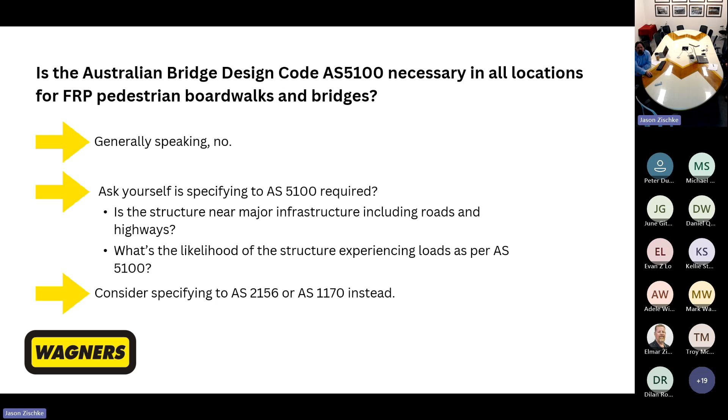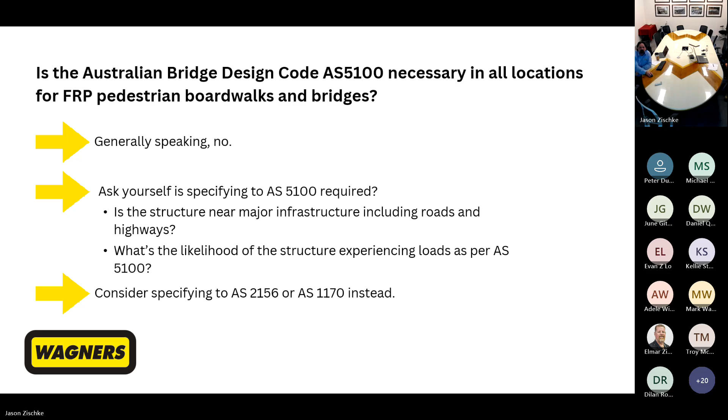And now for the visual learners that we have in the room, the next slide shows... Kellie, can you show the next slide? I think I've got the wrong one sitting up. I'll just cancel my share, but the screen doesn't seem to be showing the right one. Absolutely, no worries. Just let me pull up that presentation. Doesn't seem to be showing the right one.

Okay, so I think this is the one you wanted, Ali. Yep, this is a slide. Yeah, so basically, this is a visual representation of two bridges. Both of them are the same length, slight difference in the width, and that's mainly gonna affect the overall UDL loading on the bridge. But one of them, the Eidsvold Pedestrian Bridge, is being designed for AS 5100.

That's for TMR. The second one on the right hand side is the Scottsville Pedestrian Bridge, which is also the same length, but it's been designed for AS 1170 and AS 2156, which means basically slightly lower design loads. The point load is significantly less than the one on Eidsvold Pedestrian Bridge, and that's going to mainly affect the decking and the joist system of the bridge. But the overall design of the truss bridge is still going to be governed by the UDL and the 5 kPa loading.

However, these two bridges, as you can see, one of them is a heavy-duty bolted truss bridge to be compliant with AS 5100. The other one is a riveted light-duty truss bridge. Both of them serve the pedestrian use, and both of them meet the vibration requirement and the pedestrian comfort level. But as you can see, there will be a substantial difference when it comes to the design and the cost efficiency of these two bridges.

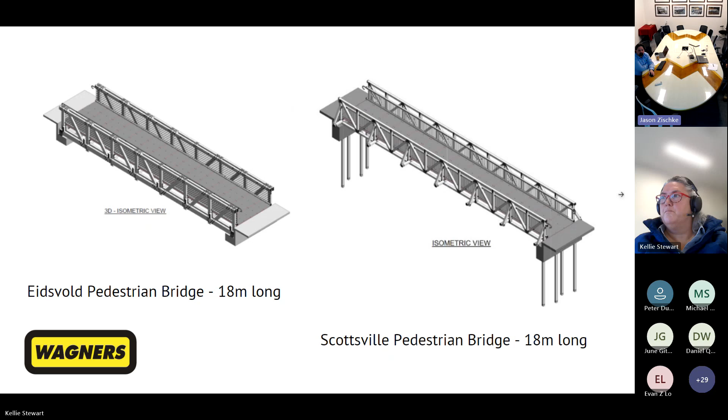And the next question, I'll hand it over to you, Jason. Yep. All right. The second question we'd like to help clarify was what track do I require for my pedestrian structure? Now, I agree that terminology within 2156.1 is very vague. Although I found one website that provides excellent clarification on this. That's the New South Wales National Parks site,

which... just a minute. That just zoomed in and out. I was hoping that moved to the next page. You can, yeah.

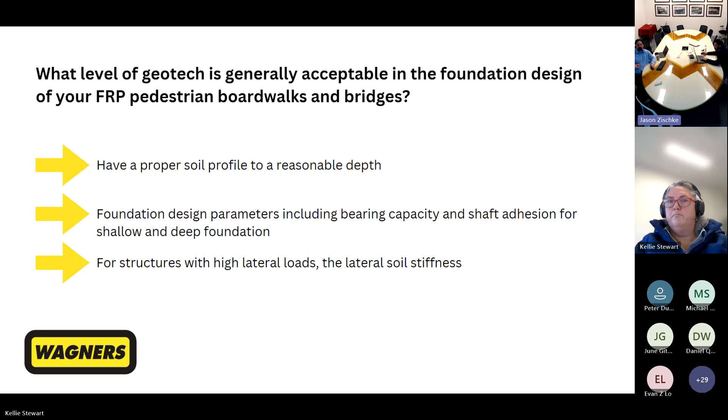Right. Okay, so our sixth question we get normally asked is what level of geotech is generally acceptable in the foundation design of pedestrian structures? The design of most pedestrian structures is completely different to your average house slab design that only requires a soil typing geotech report. As you can see on this drawing, the next one if you can, Kellie. Here we have a pedestrian bridge that we designed in Auckland, New Zealand.

These structures that we generally design are founded generally upon deep foundations, as you can see. So we need a more in-depth view of the ground's conditions in as many spots as possible. And as you can see from this bridge, it's only 66 meters long, and we have variations in the soil from the left-hand side to the right-hand side of this bridge in the subsoil layers. And for us to accurately design these foundations, we rely totally on the geotechnical engineer's determination on bearing capacities, skin friction, and lateral soil stiffness properties that these layers have been detailed as. Right.

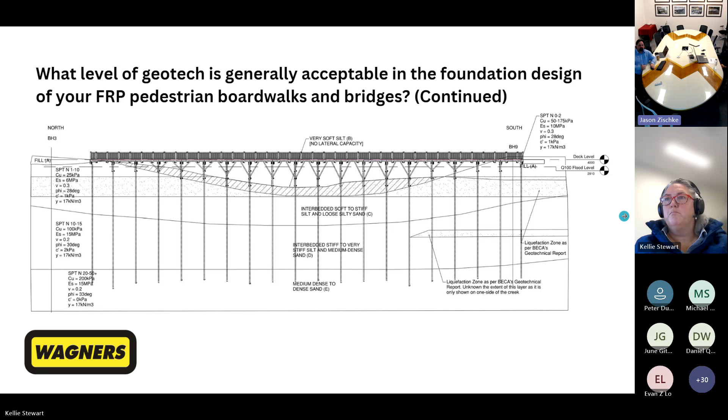Yeah, the next question is about the wave and flood modeling for pedestrian structures. So basically, this question is straightforward, and it's kind of like the answer itself. So basically, every structure within a flood zone will be required to be designed for water forces. And basically it will require a hydrology report, which usually comes from historical data with some theoretical prediction for the next events in the next 100 years or 500 years, depending on the design requirement.

And basically we will require the water velocity, and also the water level, and also the cross section of the creek, just to determine how deep the creek is with respect to the structure. Same thing basically with the wave loads. So the wave loads will be subjected to all the structures that are within the coastal zone, and also subjected to wave loads.

In other words, where the wave loads can be high enough to reach the structure or the substructure or the whole structure. So for those specific cases, we talk with the coastal engineers to provide us with the wave analysis reports and provide us with the loads in kPa to design the structures for such extreme forces, which in many cases is what usually governs the strength limit design of the structure.

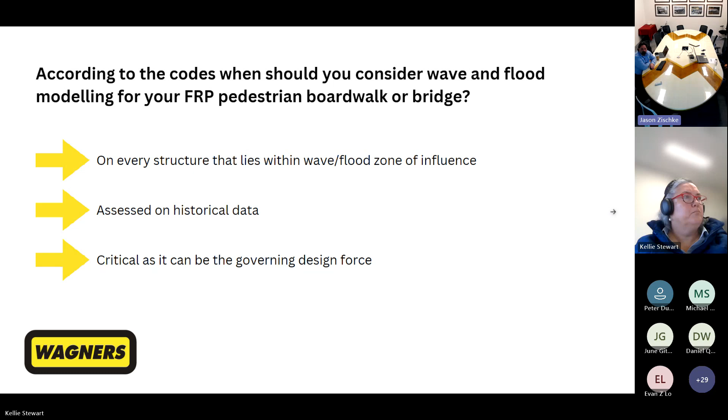So moving on, another question that arises when considering AS5100 is the effects in the difference of the deflection when designing glass composite fibre structures. On the slide here, we have two different designs. The left is a 10-metre bridge design in full consideration of AS5100 deflection requirements. As you can see here, the thickness of the floor structure is about 500 mil, whereas on the right-hand side, we have a structure that's just been designed to AS1170 deflection requirements with a much smaller floor thickness of 400 mil. Both these bridges were designed to take the same live loads, but it's just purely the deflection limit that governs that thickness.

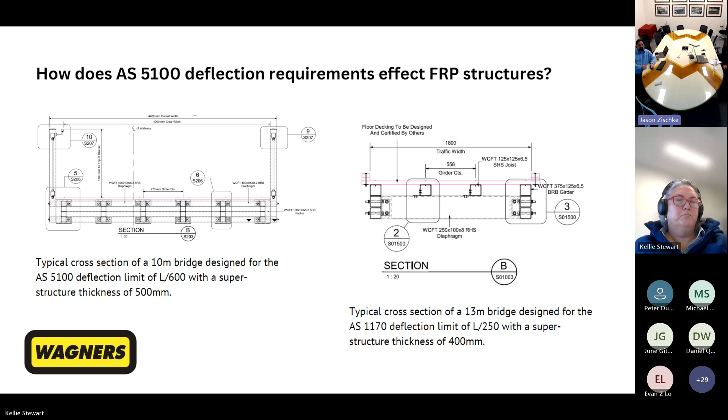You might think why this is, and the reason is the tighter deflection on AS5100 structures, and that is, I think, purely based on the importance of the structures that are usually governed by AS5100, being major highways and rail bridges. However, not all pedestrian bridges need to cover this same importance. If we move over to the next slide, I've got a bit of a simple idea of what this all means,

because I know sometimes when we throw numbers like span over 600 and span over 250, you might think that that's quite a big difference. However, a 10-metre girder bridge under AS5100 deflections would only equate to a maximum deflection of 17 mil at mid-span, whereas under AS1170 deflections, that's span over 250, that maximum would only increase to 40 mil. So that's only a difference of 23 millimetres, or for the oldies out there, that's about an inch. So not exactly much over a 10-metre span.

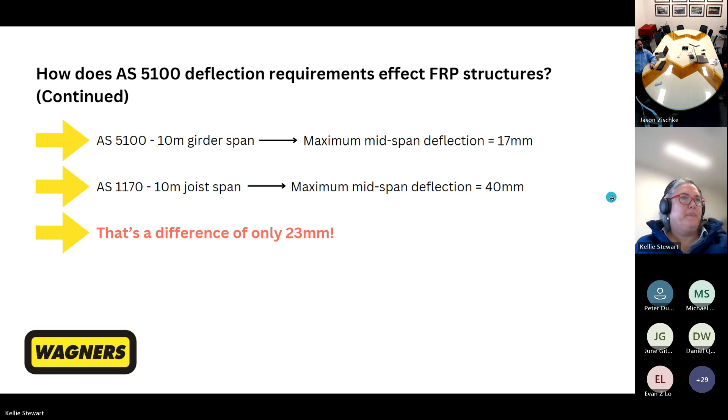I'll throw it back to Ali. Yep. This is the final question for me before I hand over to Evan. As you say, save the best for the last. This is my favorite question.

It's about the 200 kilonewton minimum lateral restraint load that's coming from AS5100, and whether it's applicable to pedestrian bridges or boardwalks, not necessarily FRP. So before I answer this question, clause C10 in the commentary section of AS5100.2 is very self-explanatory when it comes to this requirement, and it explains why this requirement is being specified in the code.

Mainly it's to enforce the good practice of using positive connection when it comes to the bridge girders or boardwalk girders or joists. Use positive connections and not rely on gravity or friction to eliminate the lateral displacement that could come from accidental impact, or that could come from a minor earthquake.

So this is mainly applicable for the super tees and massive concrete girders where their gravity load is substantial, so they can resist some wind load and maybe a minor earthquake, mainly by gravity and friction. However, that is not applicable to the small pedestrian bridges, mainly because the positive connection is used all the time, because they are not heavy enough to resist wind load and water forces.

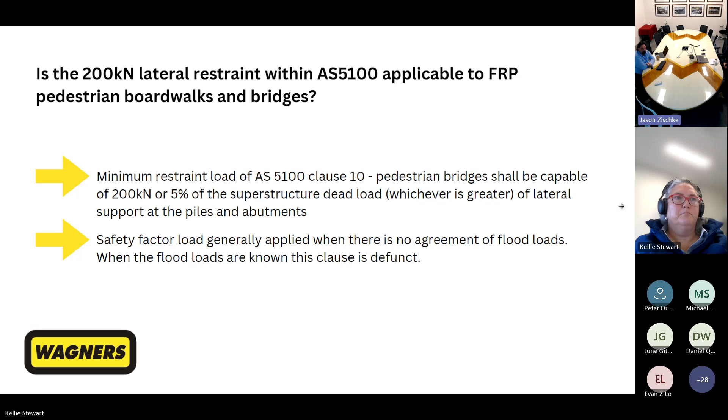Now I will hand over to Evan from TMR to address the final question. All right, thanks for that.

Look, we get commonly asked in the department how these codes are being used and implemented, and certainly for Queensland main road transport projects covered by the department, it's rarely just boardwalks and pedestrian bridges. Therefore, TMR's document provisions can, from time to time, appear overly robust when applied to a boardwalk or a bushwalking sort of bridge. For the department, the principal design reference for all bridges in Queensland is the Australian standard, AS 5100, which has recently received extensive updates.

To augment the bridge design code, which includes the design criteria for bridges and other structures, the department also has the options for designers of pedestrian and cyclist bridges to achieve value for money. So those are key documents that you could refer to on our website. And in this suite of technical guidance notes, we also make reference to the likes of AS 1170, AS 2156, and a vast range of other documents as well.

You would find that the design criteria from the department is predominantly intended for designers of road bridges carrying active crowd loads, motorised traffic, or even potentially infrastructure that is within proximity, which the department deems as high risk and potentially high consequence as defined by the department's risk appetite if a failure does occur.